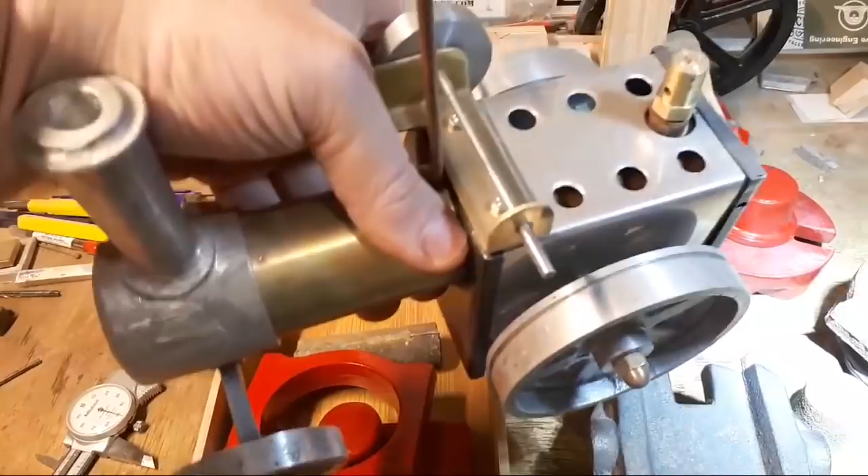I brought back some castings. I did a set of fairly rough traction engine castings. I had this set of castings on Etsy for a while, and this is the last order, I think. So I've done them and they're ready to post off.

I did a couple for Adam Carmichael, hey JB, for a milling machine conversion thing that he's spending his life being passionate about. I cast one of the steadies and it didn't turn out particularly well, so we tossed it back and it was going to get poured again. Whether I get up this weekend to get it or not, I'm not sure. But anyway...

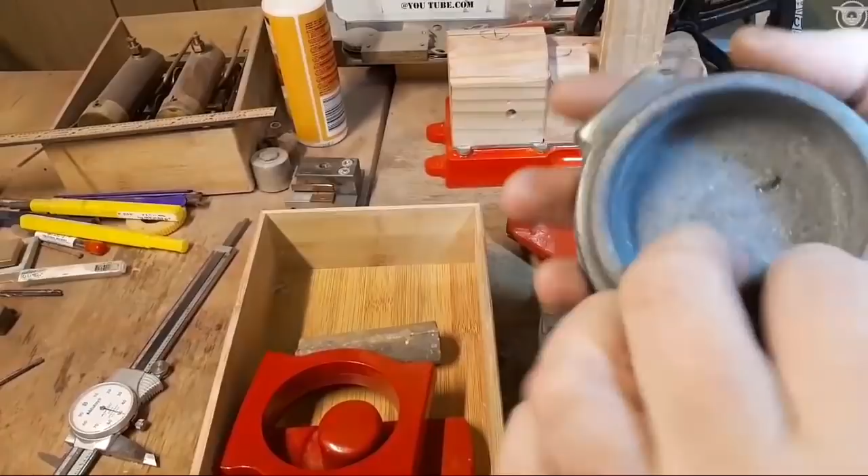That wasn't a particularly successful weekend, but I did pick up these castings. These are iron, and I'm feeling a bit lucky to have them, as this one too. These are really nice castings, actually. This has come up really nice off my pattern. Really pleased about this. I haven't even given them a scrub up yet.

And this, oh my gosh, that's heavy. I'm going to cast a steady in gunmetal, mostly because the foundry man who casts iron has had a hernia operation and a few other things, and he's out of commission for 6 weeks. So that's not going to happen just now.

Hey Morris. So this is a project that I made patterns for probably 6 months ago, and nothing happened. There's a split pattern for this one.

Yeah, it would be a bit stocky. So it's not so much that, it's lifting boxes and things around, boxes full of sand and that sort of thing. You've got to take it easy. So we're not pouring iron for a minute.

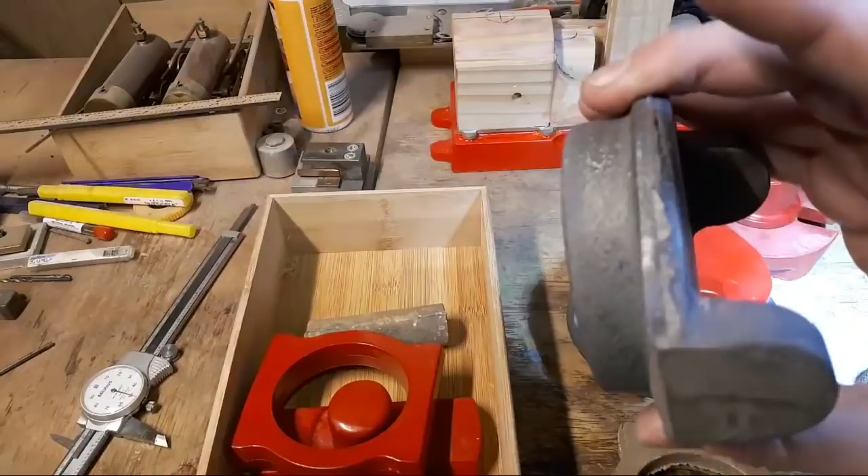This is cast really nice. And this one, it's also a 2-piece pattern. This is cast nice too. This is really heavy. It's got to have a fair bit of metal off it.

This one I got cast a while back, and this is in, I think it's bronze or gunmetal, probably gunmetal. Here's this one. And this one's gunmetal too, but I'm thinking we're probably going to pour this one again because we've got a bit of shrinkage here, and I reckon when I clean this up I'm going to find there's not enough meat in here to really do anything with. So I'm probably going to take this one up and cast it again.

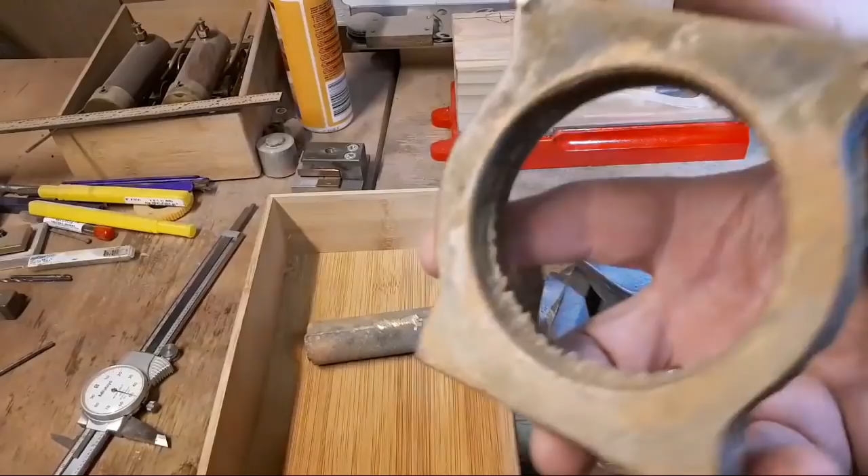Gunmetal's nice to machine, really is. It's a really nice metal to do anything with once you get all the sand and crap out of it. These actually want taken over the sink for a good scrub with clean running water and dish soap, to get all the sand out of them before we even think about machining them.

So who knows what this is? There's also a block of bar to match the same colour. And that was this pattern here. So these are all the bits to start this project. Yeah, it's a fairly complicated little kit.

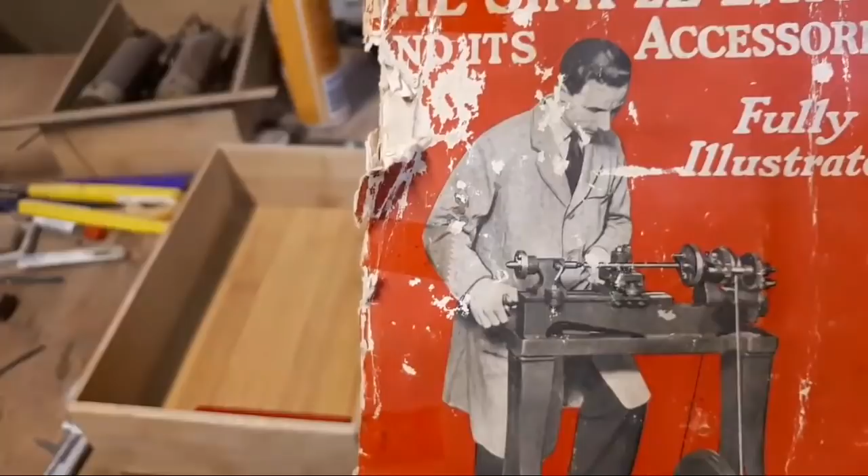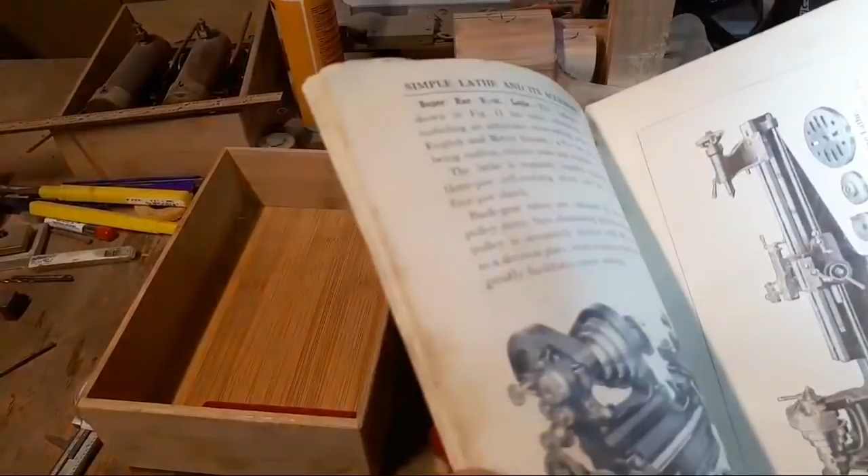This book here, pretty awesome if you see a copy. The Simple Lathe and Its Accessories, fully illustrated. This guy on the front is the expert at the simple lathe. Obviously he's got a dust coat and a collar and a tie, so probably he's the man you need to know if you've got a simple lathe like that. Cool book, it's English, and it's got how to make things and lots of cool attachments, milling attachments, and drill presses.

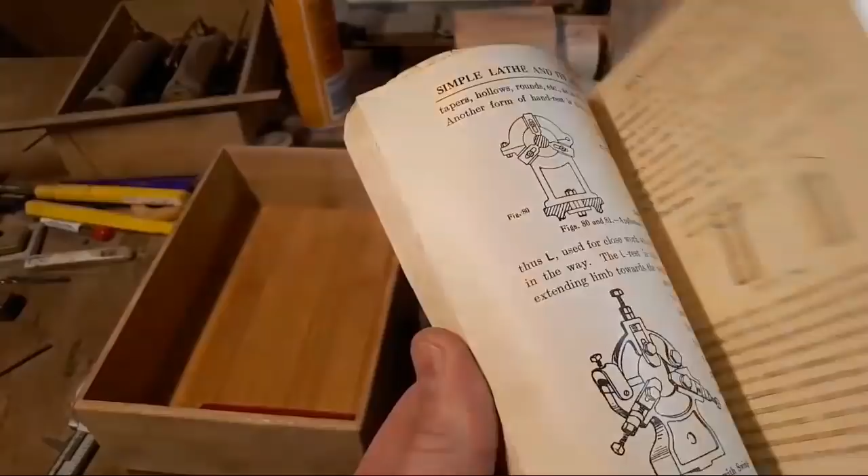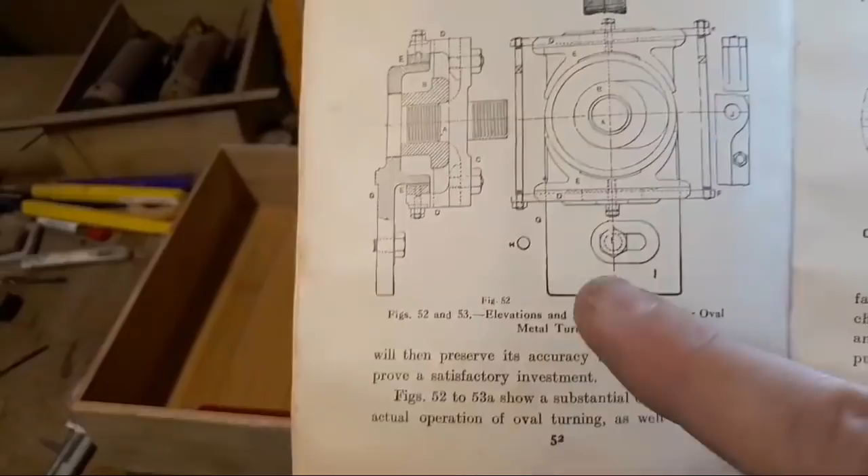But in here there's a sketch. I'll just find it. Here. Elevations and sections of a chuck for oval metal turning. Now, with a title like that, who can't be half interested in that?

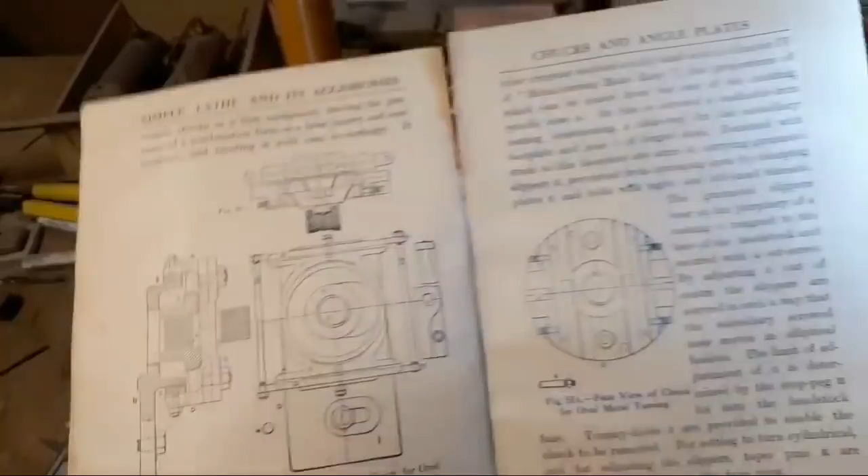So I modelled it up in 3D just to see how it worked, and certain members of my community goaded me into getting some patterns made. And now I've got castings, I probably should make it. Can probably give you some idea how it works.

This goes on the headstock of the lathe, and there's a thumb screw on each side to adjust it in and out or sideways. And this cam's machined, and this cam ring runs on that, and it's offset sideways.

This is attached through these two slots to this piece. It's a dovetail slide on here. Gosh, this is heavy. Whoa, there's a lot of metal to come off this. When this moves, this slide goes backwards and forwards.

The amount that this piece is offset. So all this goes together something like this. Whoa, that weighs about 6-7 kilos, I reckon. Hopefully we get a little bit lighter before we start spinning it around at high speed.

But that's how that works. This moves backwards and forwards on here, with a thread for the spindle here and a thread for the spindle here. So as it turns, this cam ring moves it backwards and forwards on the cam and gives you an ellipse, maybe.

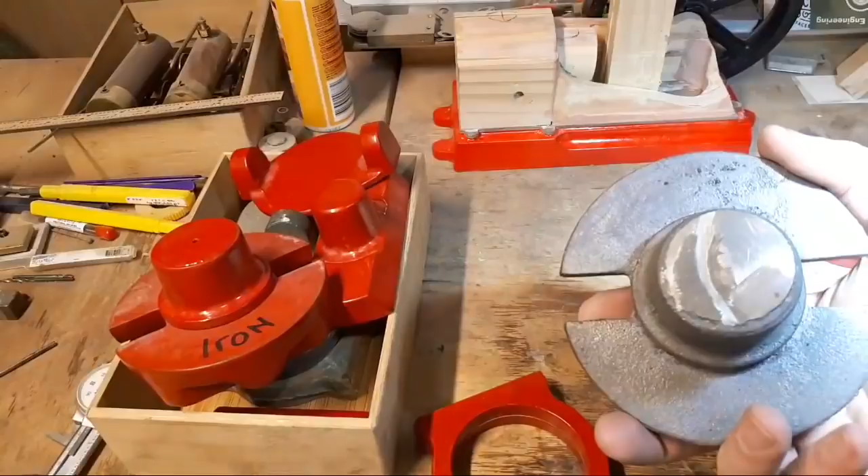I don't really have an easy answer for this, but probably by the time we get some parts machined and looking like they go together, it might work. But these are really nice castings, and they look like they're soft enough to machine too, which is also really a good thing.

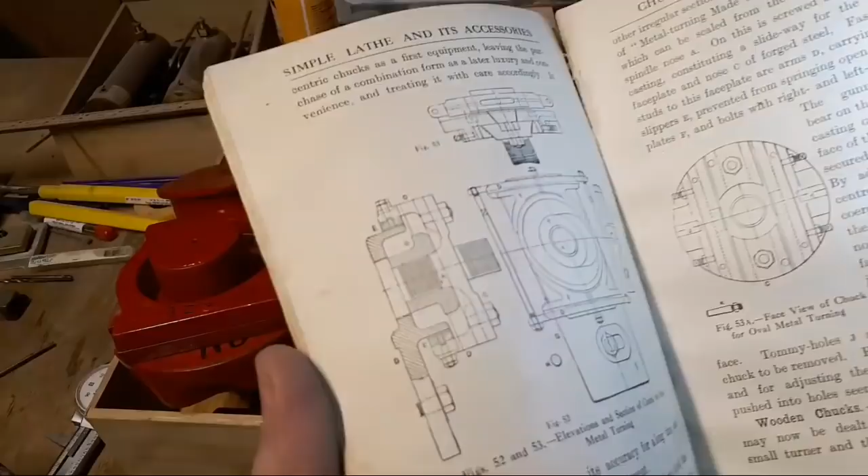Someone should scan that book. There's about 150 pages. At this point, I'll bear you in mind if I find time to do it. But there's some pretty cool stuff in here.

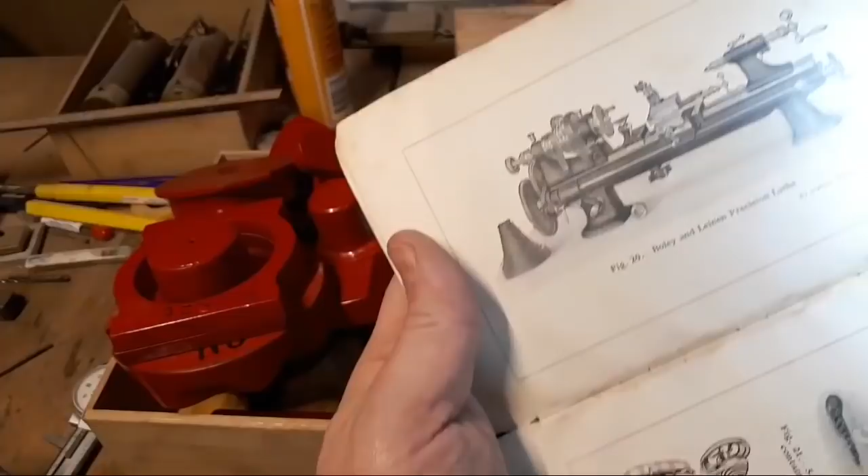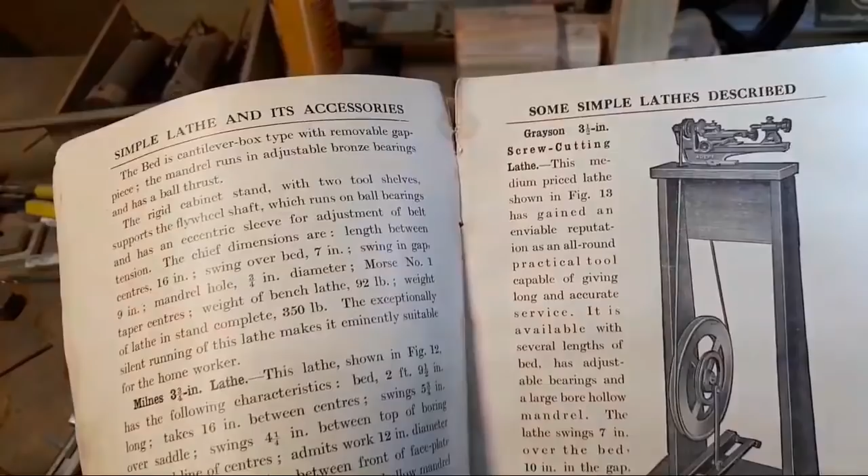It's all a little bit antique-y. Live centers, drivers. The Boley and Leinen precision lathe. The EXE bar bed lathe is kind of junk. The Adept, Super Adept, whoa, that's a bit flash. And Myford, new Myford 3.5-inch back geared and screw cutting lathe. That's an M type, I think. Gosh, that dates it pretty well.

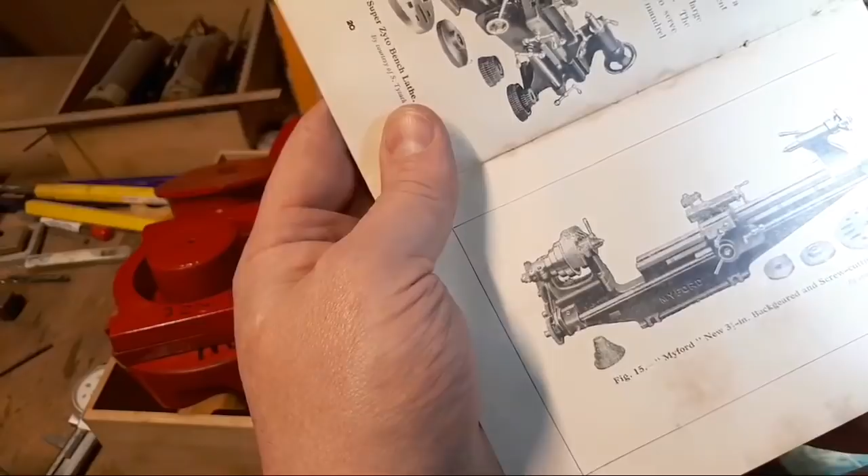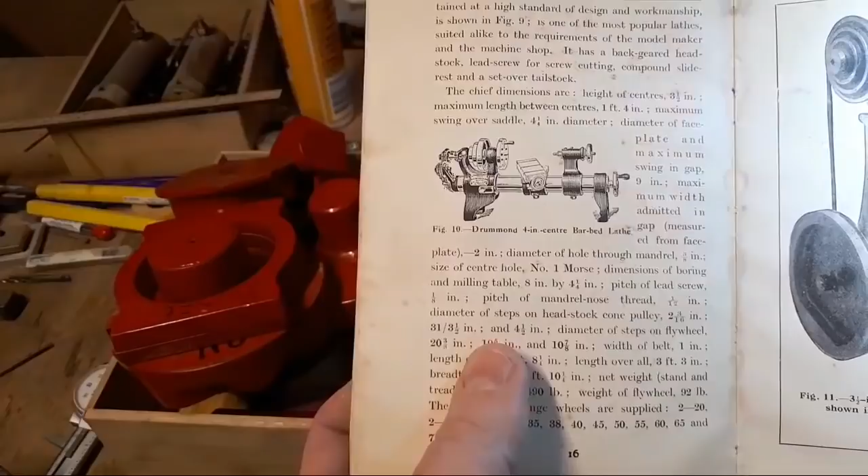Junk. Grayson, another EXE. The round bed Drummond was still in production, so that dates it. Gosh, dates it pretty well. Sort of late 30s, maybe.

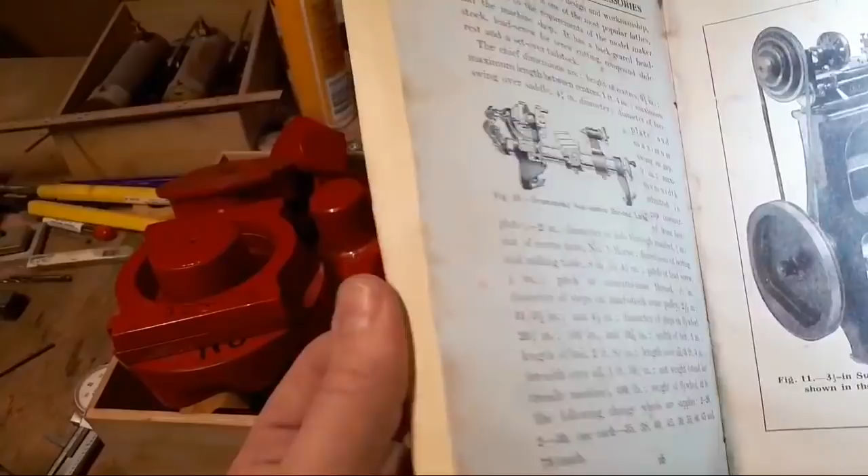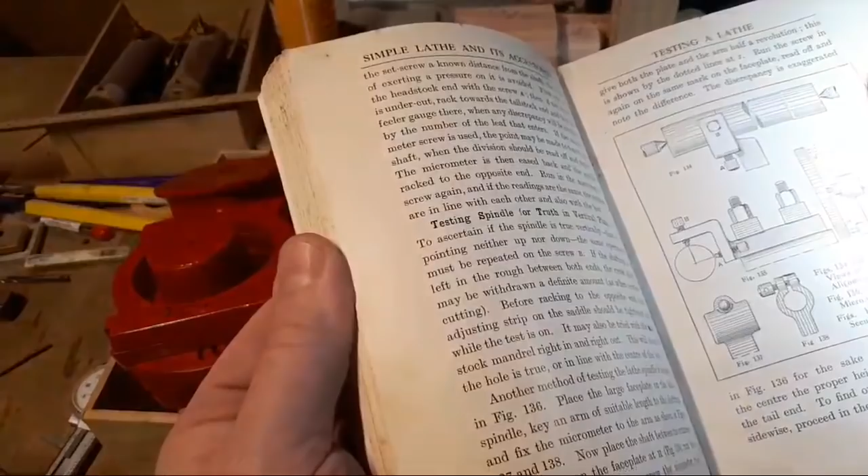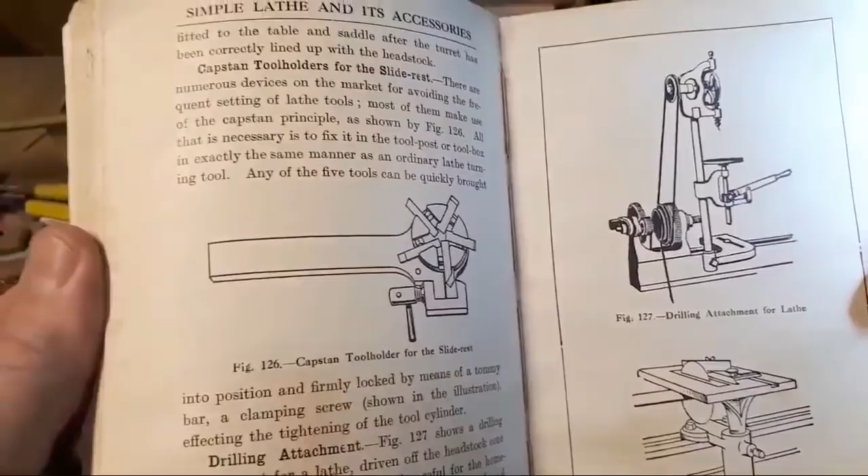So there's some cool stuff in here. Wood turning pattern makers lathes, jigs for testing lathes, cone pulley equations, drilling attachment for the lathe. Everyone needs one of them, or not, and circular saw attachment just in case we felt that was a good idea.

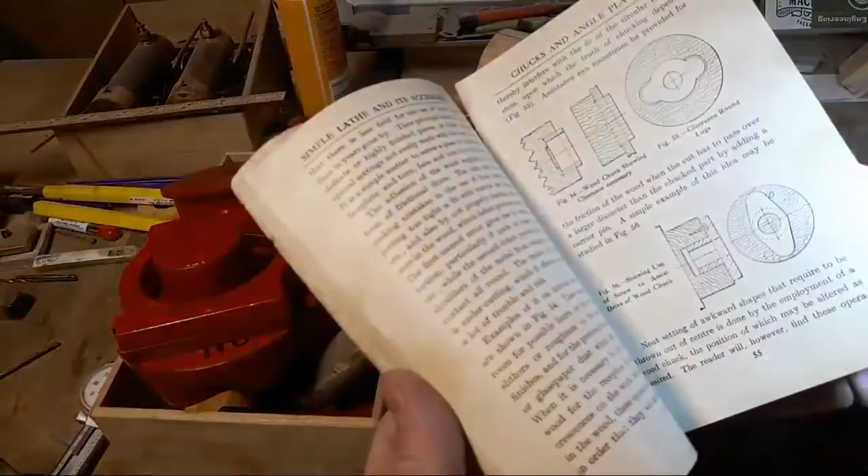I had a video half made about converting crappy pencil sketches like this one, this sort of thing, to actual working drawings, and how to scale them, things like that. I'm working on a video on that, the tools you use and the way it's done, or the way I do it. That's fairly interesting, using this as an example and using this as an example.

And I had hoped to get some more information about that steady, but we ended up tossing it back and getting another one cast. So that didn't happen this weekend. I just spent it messing around with this.

You've just got to get started on things. That's the answer. You just got to get in and get started.

I've got a nice set of patterns, and if nothing else, they're going to look nice on the shelf. We'll see how we go with this. I've got a nice set of castings, and they look good on the shelf too, but they weigh a ton.

They're really pretty heavy. I've got these 2 locomotives here I want to get finished too. I've stalled on them because the engines on them are pretty fiddly, and I really need a reversing motor on my milling machine before I do them. I've attempted them once and had no luck, so that's why that's stalled, unfortunately.

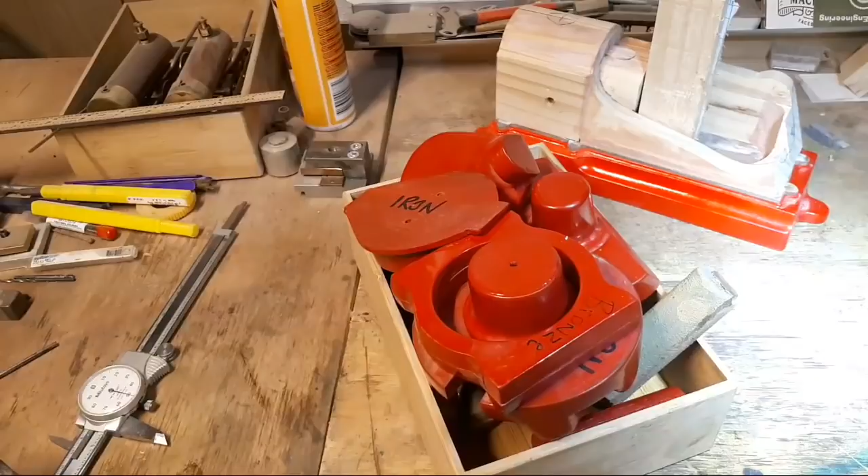Spring belts arrived for the little traction engine. We can go ahead and get that finished. Still waiting on back order on my other Sherline chuck. That hasn't arrived.

So it's pretty full on. I need to get in and make things, so we'll see when that's going to happen.

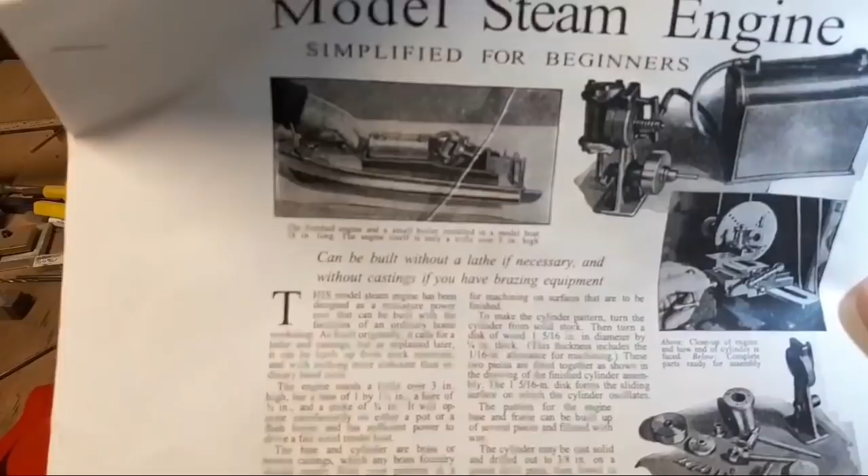But this is a joint project. It'd be really nice, actually.

Mark, yes, you totally should drive down. Go and see A-Bomb.

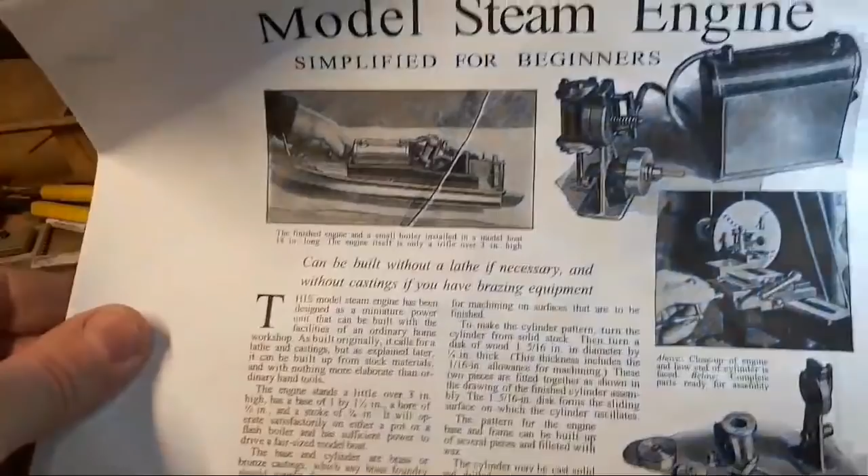Chirpy and I are building this. You might have seen a video on the castings for the engine. And it's a little boiler. And this little engine - he's made patterns for this, and he's going to send me a set of castings.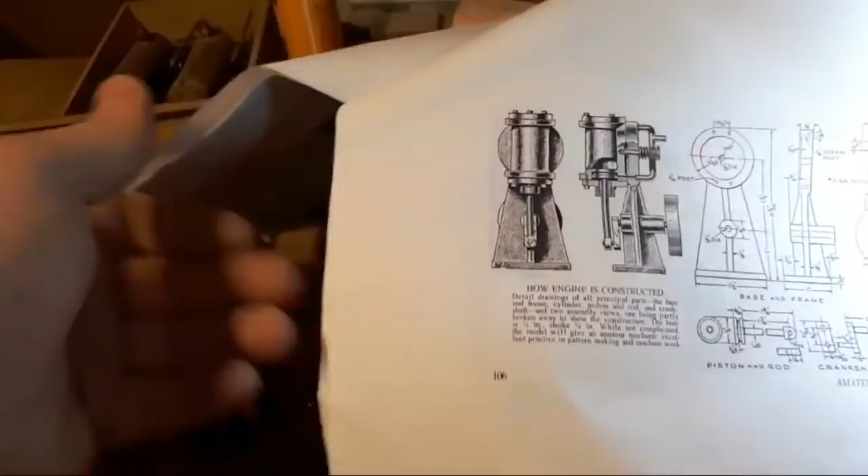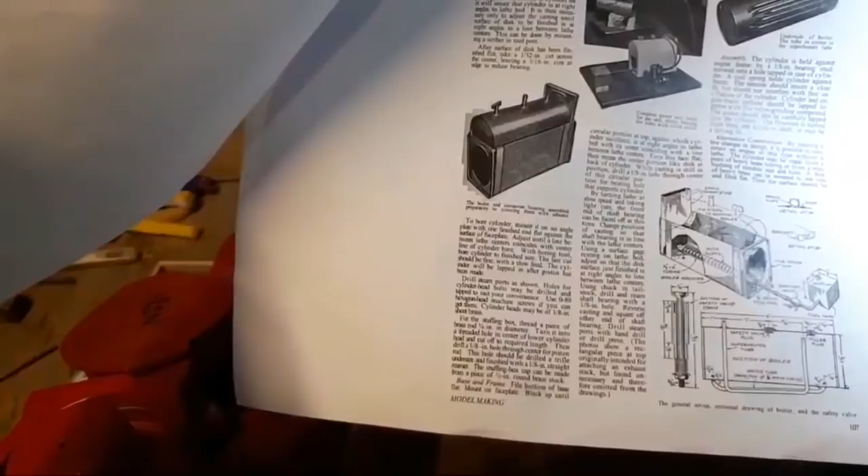I'm going to make a little boiler. It's probably not like this one - this is pretty scary, actually. But something in the same spirit as this, probably, as a marine engine. Probably less soft solder and jam tins, but more copper and silver solder and stays and things.

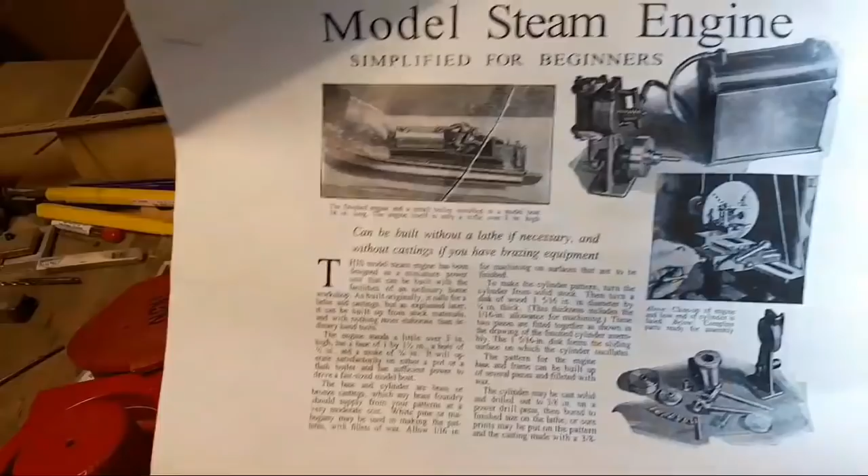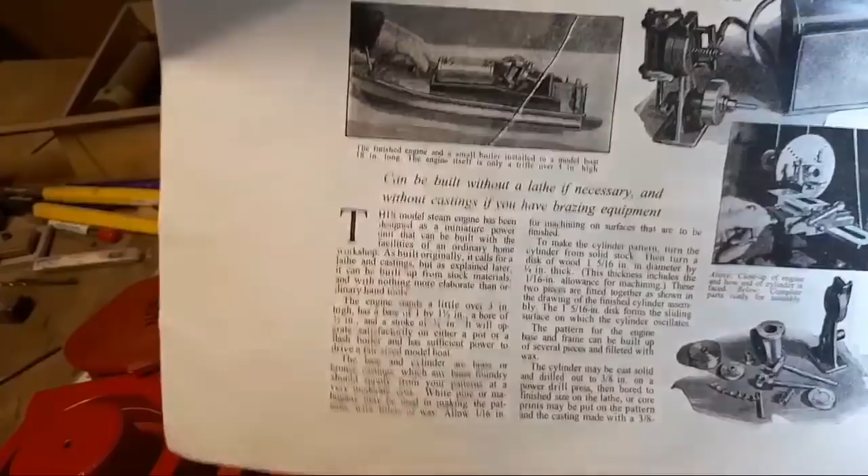But that's happening, so keep an eye out for that. I've got materials to do my bit, and I think he's got materials to do his. We're both busy, but eventually that will happen. So go and check out Chirpy's Tinkering - cool channel, he does some nice things, and does some cool stuff without very much equipment. So worth going and having a look at, but keep an eye out for collab videos there.

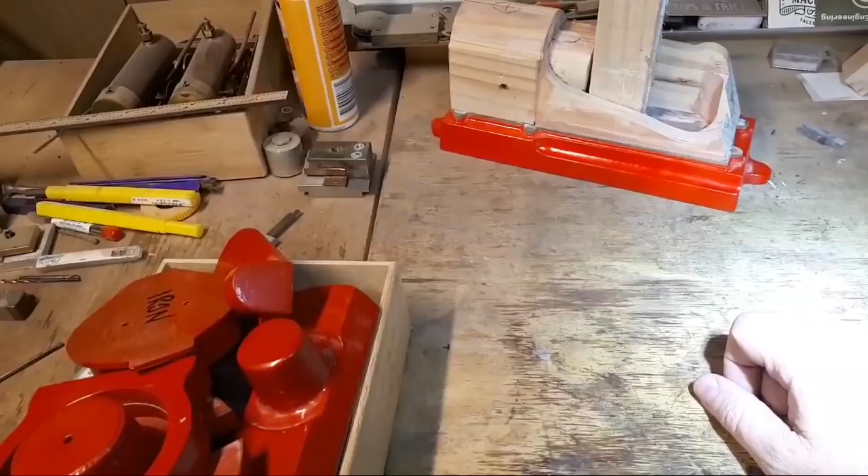Apart from that, I don't think there's very much to report. It's been a fairly boring week. There's not much happening here, so I might sign off.